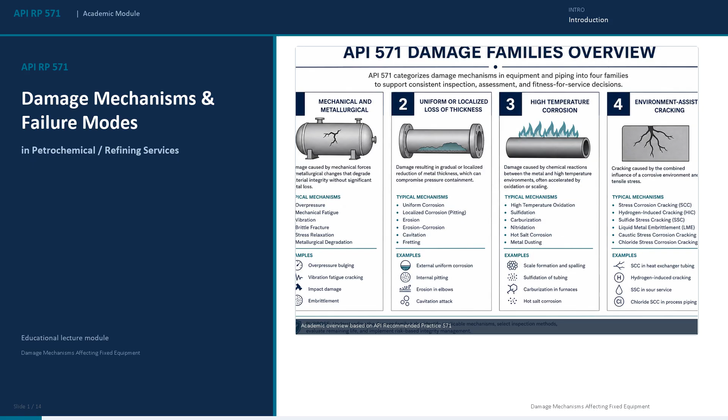Definition: a damage mechanism is a specific process that causes degradation of materials or equipment. A failure mode is the observable way that degradation produces loss of function, such as leakage, rupture, cracking, or wall thinning.

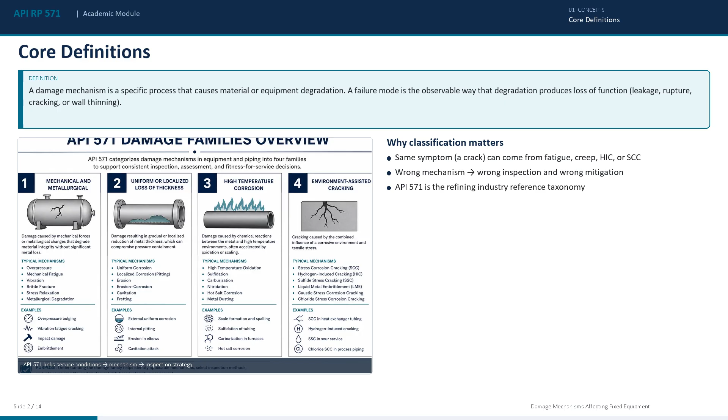API 571 classifies refining damage mechanisms so engineers can link service conditions to the correct inspection and mitigation strategy. It groups damage into four families: mechanical and metallurgical degradation, uniform or localized loss of thickness, high-temperature corrosion, and environment-assisted cracking.

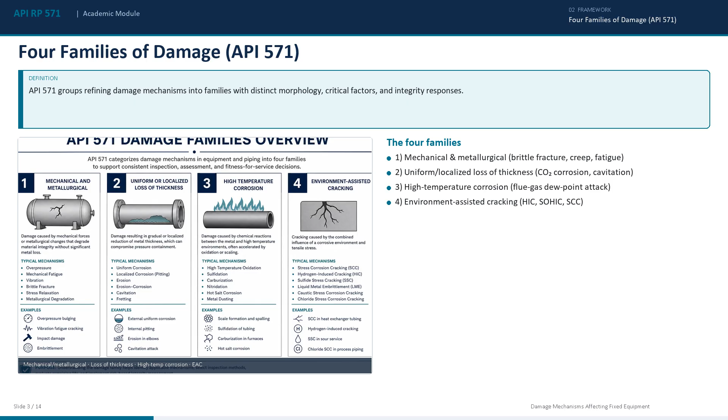Brittle fracture. Definition: a sudden fracture with little or no plastic deformation. Cracks are typically straight and non-branching. The fracture surface is dominated by cleavage. Critical factors include low temperature, thick sections, high stress, and flaws.

Prevention uses impact-tested materials, post-weld heat treatment, and control of pressure and temperature versus the minimum safe operating temperature. Inspection alone does not normally mitigate this event-driven mechanism.

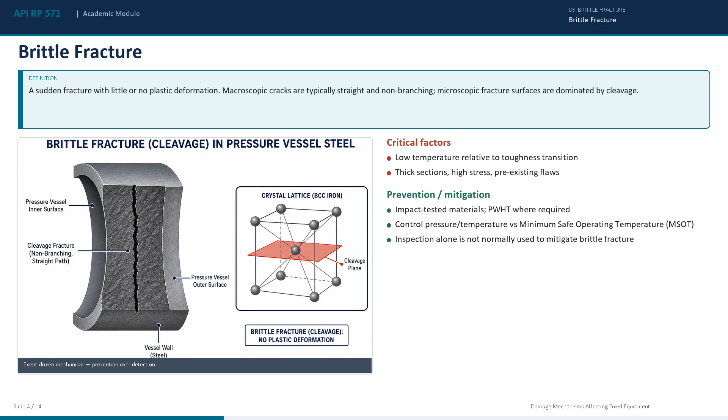Creep and stress rupture. Definition: time-dependent deformation under load at elevated temperature, even below yield strength, which can progress to rupture. About a 25-degree Fahrenheit rise, or roughly 15% more stress, can halve remaining life.

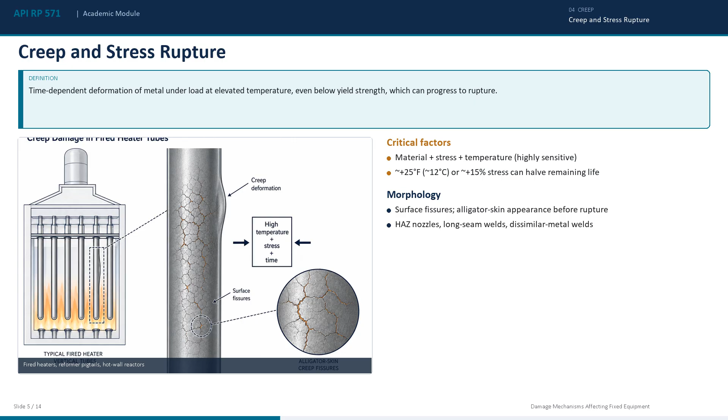Typical locations: fired heater tubes, reformer pigtails, and dissimilar metal welds. Morphology often shows alligator skin surface fissures.

Mechanical fatigue. Definition: cracking from cyclical stress, usually below yield, often causing sudden failure. Cracks start at stress raisers, weld toes, notches, and pits.

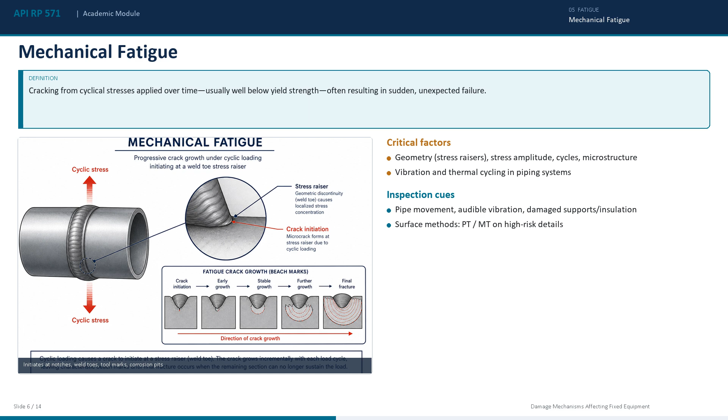Monitor vibration, pipe movement, and supports. Use penetrant or magnetic particle testing on critical details.

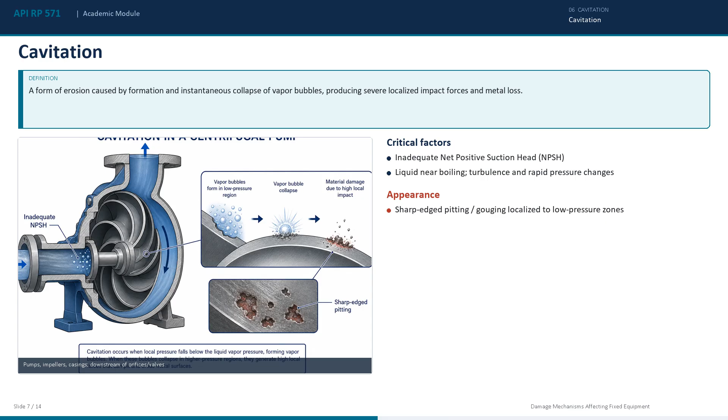Cavitation. Definition: erosion from collapse of vapor bubbles, producing localized impact and metal loss. The key pump factor is inadequate net positive suction head. Appearance: sharp-edged pitting on impellers, casings, and low-pressure piping zones.

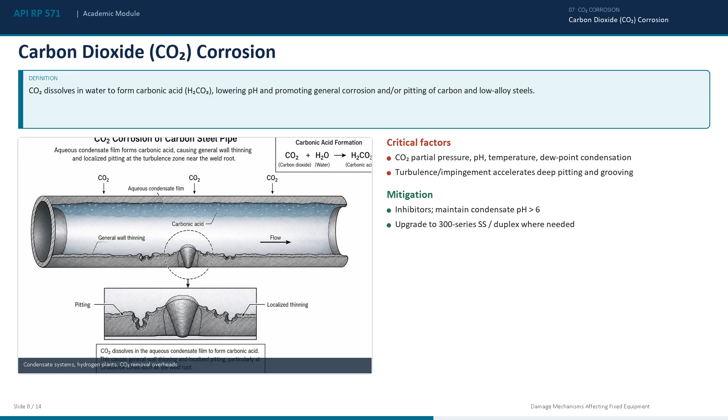Carbon dioxide corrosion. Definition: CO2 in water forms carbonic acid, promoting general corrosion and pitting of carbon and low-alloy steels. Critical factors: partial pressure, pH, temperature, and dew point condensation. Mitigate with inhibitors, condensate pH above 6, or stainless upgrades.

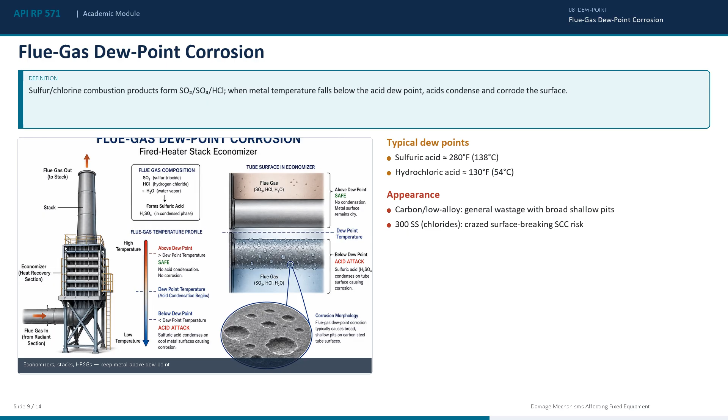Flue gas dew point corrosion. Definition: sulfur and chlorine combustion products form acids that condense when metal temperature falls below the acid dew point. Keep economizer and stack metal above dew point, about 280 degrees Fahrenheit for sulfuric acid, and about 130 for hydrochloric acid.

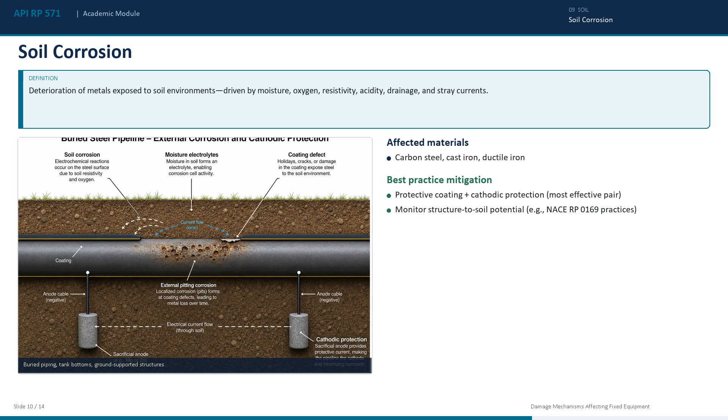Soil corrosion. Definition: deterioration of metals in soil. Critical factors: moisture, resistivity, acidity, and stray currents. Best practice: protective coating plus cathodic protection, monitored by structure to soil potential.

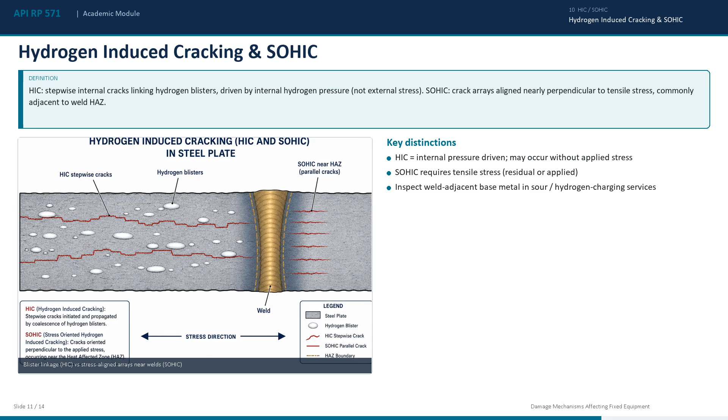Hydrogen-induced cracking forms stepwise internal cracks linking hydrogen blisters, driven by internal hydrogen pressure. Stress-oriented hydrogen-induced cracking aligns near welds under tensile stress. Stress corrosion cracking requires a susceptible alloy, tensile stress, and a specific environment, and typically produces branched cracks.

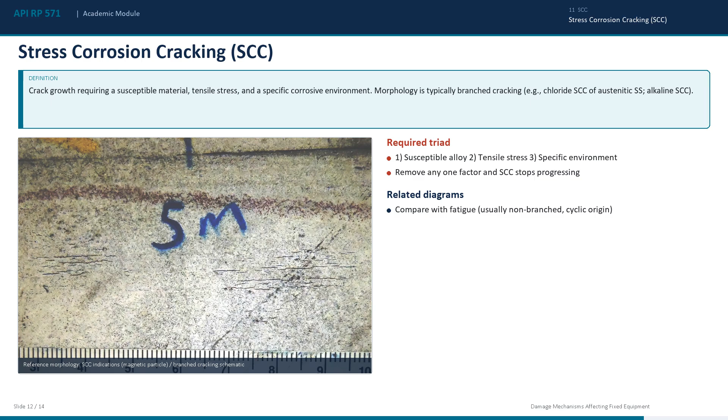Integrity practice is one loop: identify credible mechanisms, quantify critical factors, set materials and limits, then verify with mechanism-appropriate NDT methods, including visual, ultrasonic, radiographic, magnetic particle, and penetrant testing.

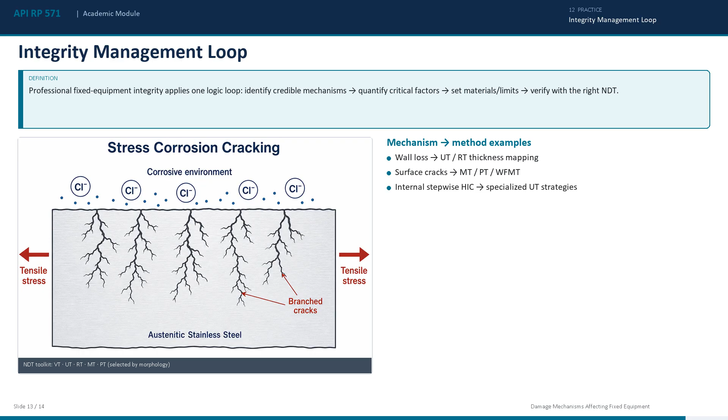In summary, the damage mechanism explains how degradation occurs. The failure mode describes how that becomes functional loss. Correct identification using API 571 is the foundation of safe petrochemical fixed equipment integrity.